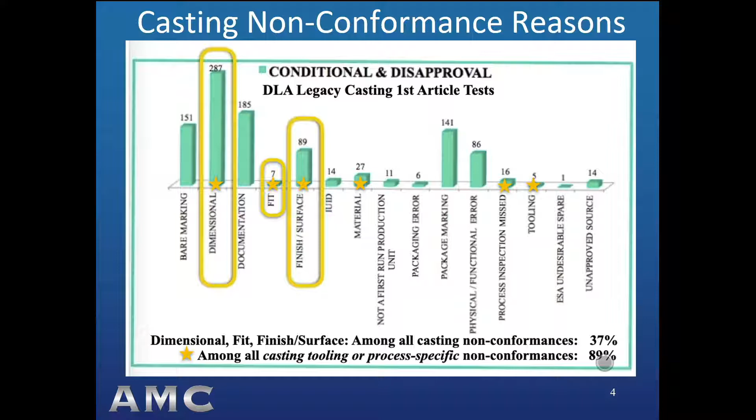Let's investigate why. The major and most difficult to solve problem in making casting dimensions comply with tolerance specification is the phenomenon I call pattern maker's contraction, commonly referred to in metal casting jargon as the shrink rule. When materials solidify from liquid, most of them, including all metals, form a crystal structure that's smaller in volume than the atomic arrangement in the liquid.

This is different from solidification shrinkage, so that's why I prefer to call the phenomenon pattern maker's contraction, to avoid confusion in terms. Interestingly, ice expands to a larger crystal structure than the atoms of liquid water, and that's why ice cubes push up out of the ice cube tray and are larger. Well, the opposite phenomenon occurs with metals in casting molds - the metal wants to get smaller, and the mold pushes back.

As the crystal structure is formed, the dimensions get smaller, pulling away from mold walls and often causing distortion as the mold pushes back in local areas. So the consequences of shortening dimension lengths is difficult to predict, but it gets worse.

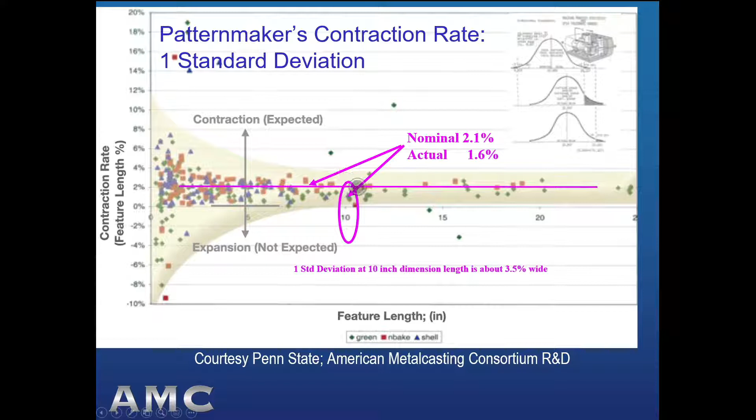But in this case, we actually got 1.6%. So you can see that even at a longer dimension where the one standard deviation gets smaller, we still have significant variation.

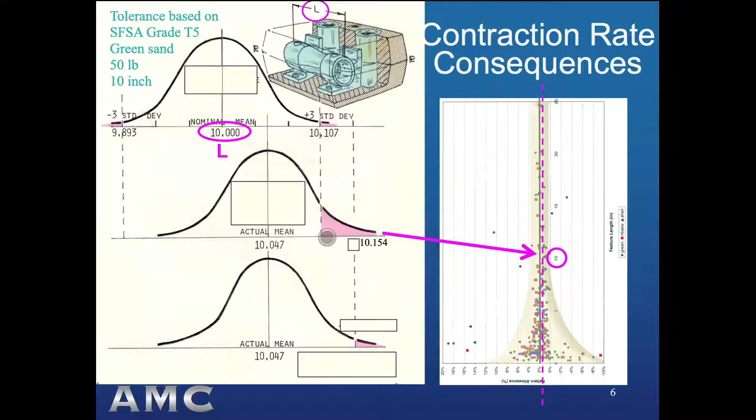So a pattern maker's contraction rate is a guess made by the mold cavity tooling builder, and the data shows why that guess is problematic, and it shows why dimensions are so difficult to achieve correctly in the first article inspection. But that data with all the variation was just for one metal alloy family, the carbon and low alloy steels.

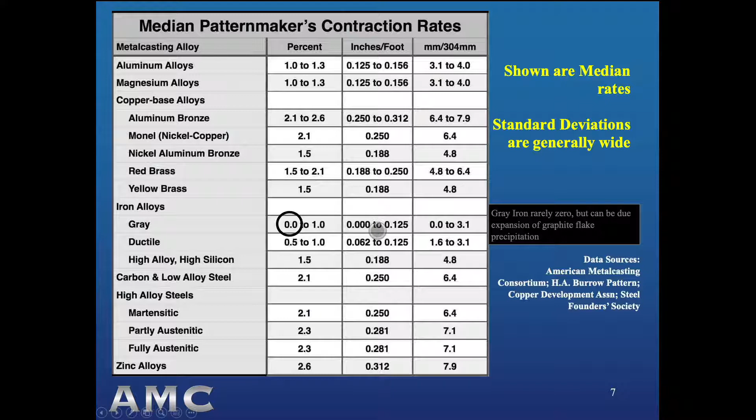Look here at all of the many metal casting alloys, and look at the difference in the center column, which is the standard parameter, inches per foot of contraction, and just look how much the median rate for each of these alloys differs. When I was making castings, here's a chart that I used to help me and my mold cavity tooling builder collaboratively make better pattern maker's contraction rate guesses.

If we missed, we missed. We would have to fix the tooling and make new prototype castings to see if we did fix it, but we tried, and at least we thought about it carefully.

Now, look at this center column labeled full, marked in light orange. Full means that after we chose the contraction rate, we built the tooling on the large side of the dimensional range. For risky dimensions, that meant that when we missed the contraction rate, which we sometimes would, all we had to do was remove some tooling material to fix it. With metal tooling especially, having to add small amounts of material to the tool is a disaster for tool life.

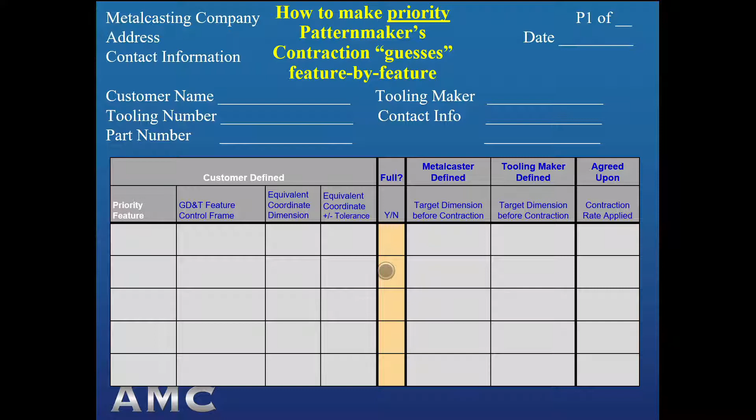The next most significant variable in the control of dimensional tolerances, but much more controllable, is mold degrees of freedom. In other words, freedom of movement in the assembly of the mold cavity. Most casting molds are assemblies of mold halves, cores, chills, and perhaps printed mold elements from additive manufacturing, but not all molds.

Some are close to monolithic, most notably investment castings and sometimes die castings and lost foam castings. As we will see in an upcoming slide, even those mold cavity making processes can have degrees of freedom that affect dimensions, but not as much freedom relatively speaking.

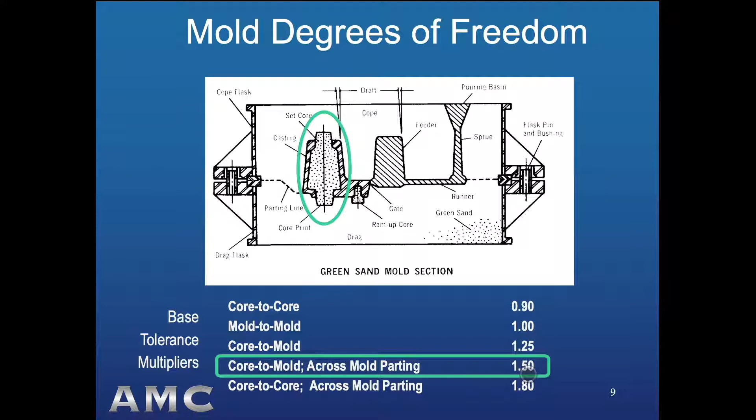The consequence of the variation in the mold assembly results in a tolerance coarsening of 150%, or 1.5 times the base tolerance of the features formed in the bottom half of the mold only. So if the tolerance for the hole formed in the bottom of the tall core is plus or minus 2 millimeters, then the tolerance for the hole formed at the top of the core is 1.5 times that base tolerance, or it becomes plus or minus 3 millimeters.

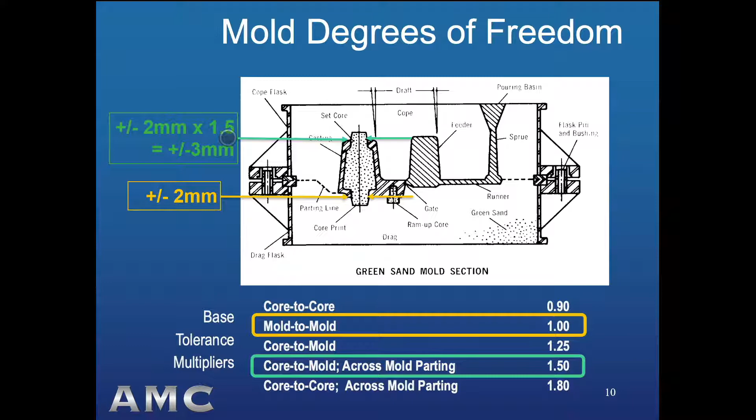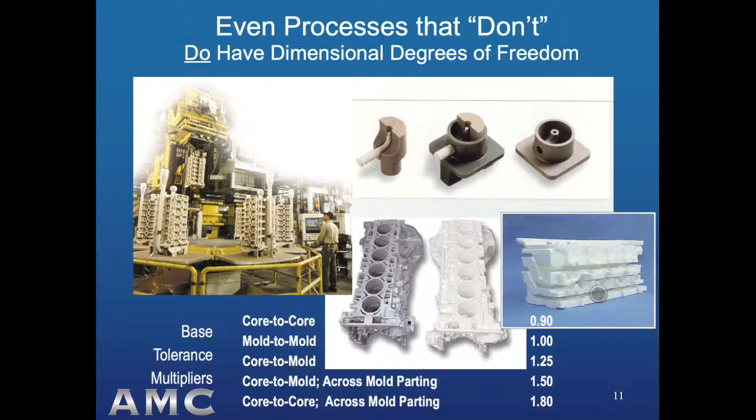The idea of draft is most easily visualized as a cupcake in a cupcake baking pan. If the pan doesn't have slanted sides in the cupcake pockets, the cupcake can't be removed from the pan. Since baked cupcakes don't have much tensile strength, very much pull on the cake will break it. So that slant in the pan pockets is largely there to enable release from the pan with little force, to get the cake to release from the pocket's side surfaces.

Pulling mold cavity elements out of tooling to form casting molds is the same. Some materials like wax are slick and relatively strong, so the slant can be small. Other materials like green sand are not very strong against a pull, so the slant has to be much larger. Getting a solidified casting out of a metal mold requires a much larger slant still. That slant is commonly expressed as an angle known as draft. For the metal casting processes and their tooling types, that angle commonly varies from half a degree to 3 degrees, and in some cases can be as large as 5 degrees.

Standard practice in specifying draft in casting designs is to define it as the draft angle. But that angle, which seems appropriate enough, causes first article approval problems all by itself.

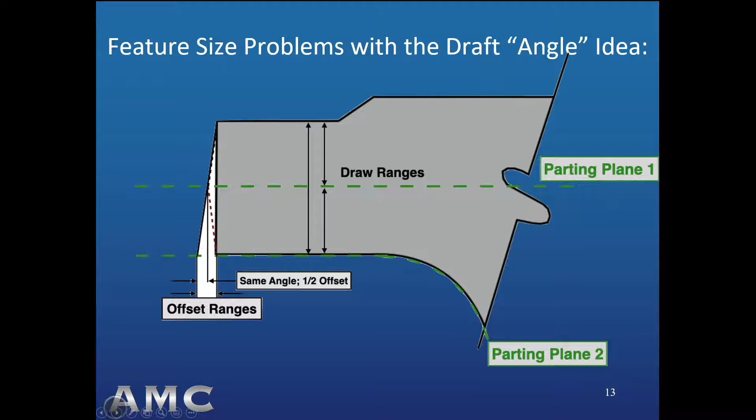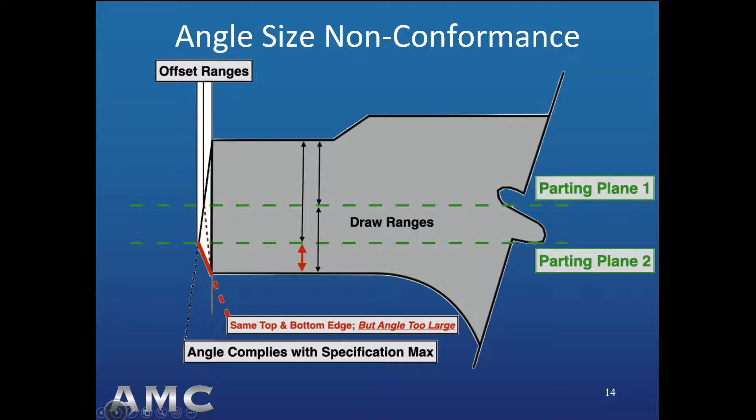The summary of draft angle versus draft offset and draft draw length concludes our discussion of the reasons for dimensional non-conformances in first article inspections. You will recall that the major cause of first article non-conformance in DLA's study of all causes was surface finish. Together with dimensional issues, surface finish inconsistencies are the other major contributor to the 89% of all casting-related first article non-conformances. Here's Mike again to explain surface finish.

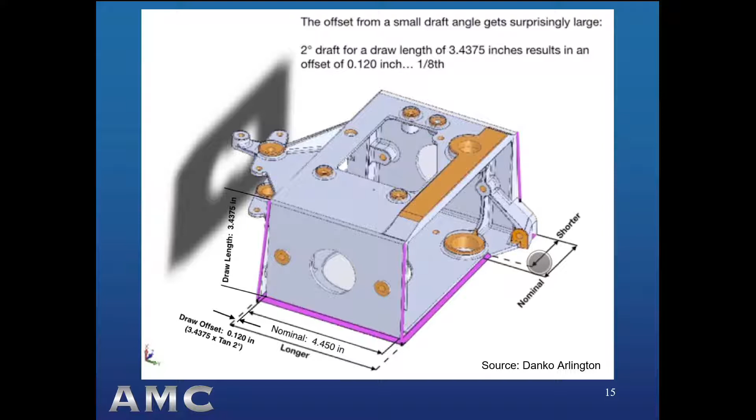We've now seen the factors that complicate dimensional tolerance compliance in first article inspection, but now let's look at the other major cause of casting non-conformances, which is surface finish. Surface finish, along with dimensional tolerances, compose 37% of all casting non-conformances in that DLA Pareto chart, and 89% of the non-conformances that are specific to the casting processes and the casting tooling. So first of all, let's just look at how surface finish should be measured.

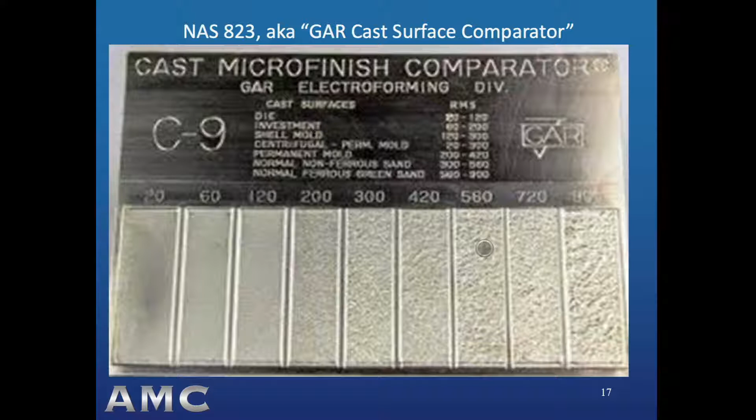This is the National Aerospace Standard 823, also known as the GAR Cast Surface Comparator. Basically, these surfaces are replicas of actual casting surfaces, and this is the best way to evaluate a casting surface because you can hold the plate up against the light at different angles, touch it, touch the casting, and make a visual and tactile comparison of surface finish most effectively this way.

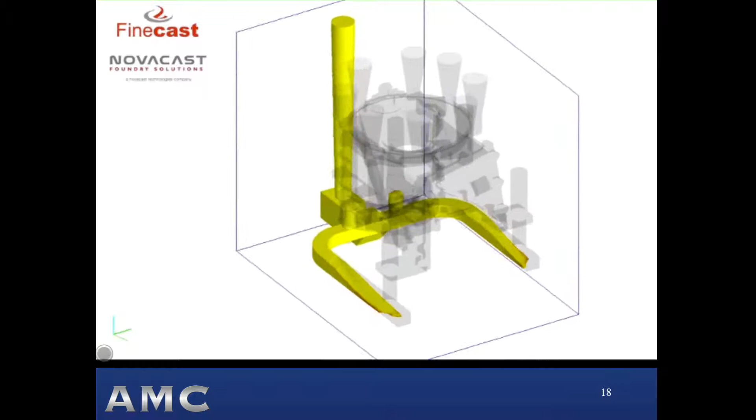What then complicates the surface finish if that's all there is to it? Here is the reason: a mold filling. This is an aluminum automotive casting in a safety critical application, and it is being filled as it really occurs in the mold. So what we're seeing is the mold cavity being filled, and attachments to the mold cavity that enable the filling and also feed solidification shrinkage to achieve the specified mechanical properties.

So all of these attachments from the mold filling system, from the risers which feed solidification shrinkage, and even some surfaces that may have a chill against them to help solidify quicker, all of those surfaces aren't like the surface comparator we just looked at. These surfaces are actually cut away by a cutting operation depending on the alloy, then lightly ground to try to replicate this original profile, and then media blasted to make the grinding marks go away and look like the as-cast surface as much as possible.

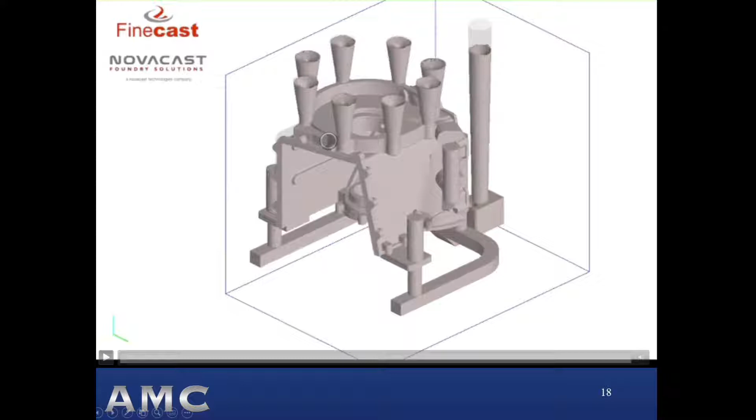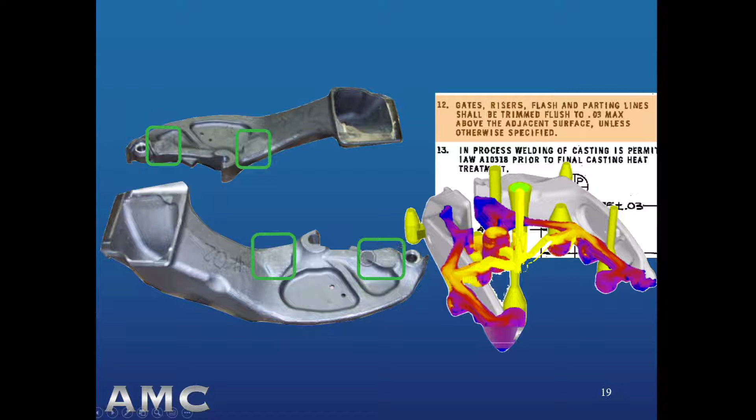Well, notes like this help: gates, risers, flash, and parting lines shall be trimmed flush to 0.03 of an inch max above the adjacent surface unless otherwise specified. And that's the kind of callout that allows this raised surface here and here.

As we have seen, all castings have surface anomalies from process interface geometry - that is, the gate, riser, chill, and vent attachments that have been cut off. The remaining stubs are ground down by hand to match the adjacent as-cast mold cavity surface finish as closely as possible, and then the casting is media blasted to smooth out the grinding marks.

The same surface treatment process is applied to another cause of casting surface anomalies. This cause is in-process weld rework, a normal finishing process on any weldable metal casting alloy. In-process weld rework is a normal consequence of liquid metal mold filling, solidification surface imperfections, or finishing handling. Most common anomalies from pouring and solidifying are non-metallic inclusions and incomplete edges on fine corners of the casting geometry, as we see here. Casting finishing processes cause surface anomalies too.

Most common in finishing processes are the dents and dings from handling, overgrinds, and small quench cracks from heat treating. Extremely shallow surface anomalies are often blended away by hand grinding, leaving a very shallow minus metal profile on the casting surface.

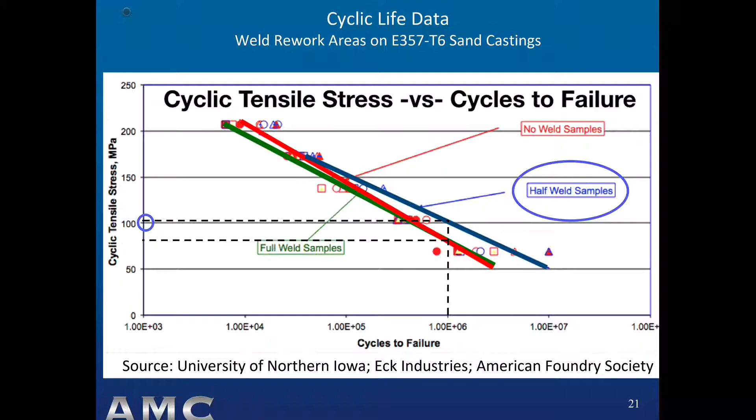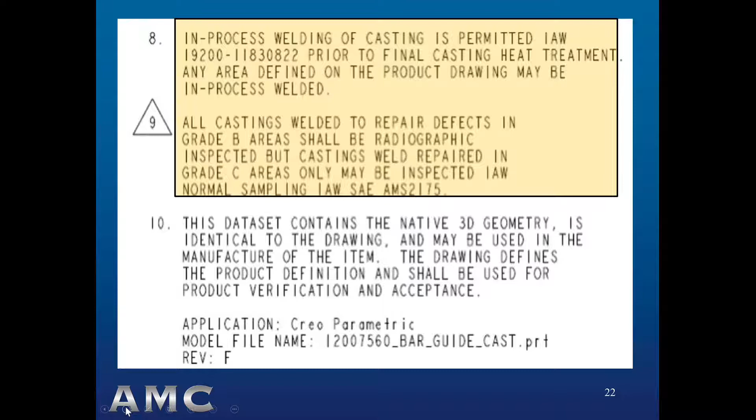Here's a well-crafted drawing note specifically allowing in-process weld rework and differentiating grade B and grade C solidification areas in accordance with AMS 2175. Returning to the same example of the in-process weld rework of the aluminum casting with the sand inclusion defect, here is the non-destructive testing documentation that the weld repair we see meets AMS 2175 grade B solidification integrity.

Now please meet our CASTED teammate, Keith Sturgill. Keith is based at the Defense Logistics Agency's Aviation Supply Center in Richmond, Virginia. Keith supports CASTED efforts from inside DLA as a graduate materials engineer, with a career in the Navy specializing in jet engine materials and components.

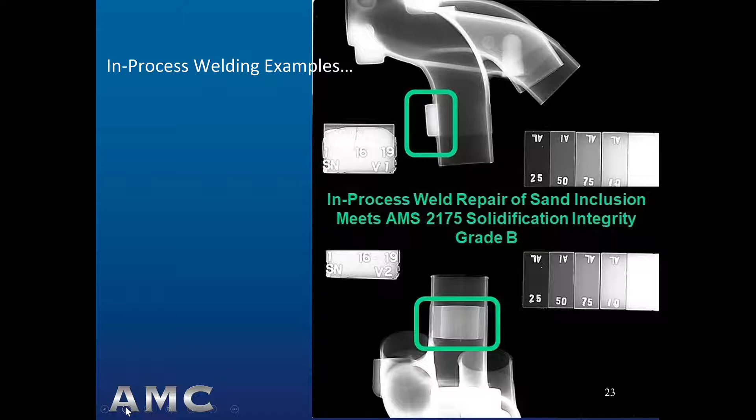Keith will give us an overview of the roles of the 4 who's involved in the preparation and inspection of DLA legacy casting first articles. Here's Keith. As Mike has said, there are 4 who's in the production, inspection, and approval of DLA Cold Start legacy casting procurements.

As an overview and as a notional estimate using the 80-20 rule, here are the relative responsibility percentages for casting quality of the 4 who's that Mike talked about. First, the Cold Start new awardee has about 80% of the responsibility. Second, the first article inspection lab has about 10%. Third, the engineering support activity about 7%. And lastly, the Defense Contract Management Agency has about 3%.

In addition to having the most responsibility by far, the Cold Start new awardee is typically a team of suppliers, frankly, in both the private and military/aerospace sectors. The recipient of a purchase order or a contract typically doesn't think of their business as a member of a team of businesses.

70 years ago, when manufacturing businesses were vertically integrated, one company had the breadth and depth of talent, resources, and plant equipment to manufacture complex engineered components complete and in-house. Occasionally, a metal caster will encompass all necessary processes, but it is now rare.

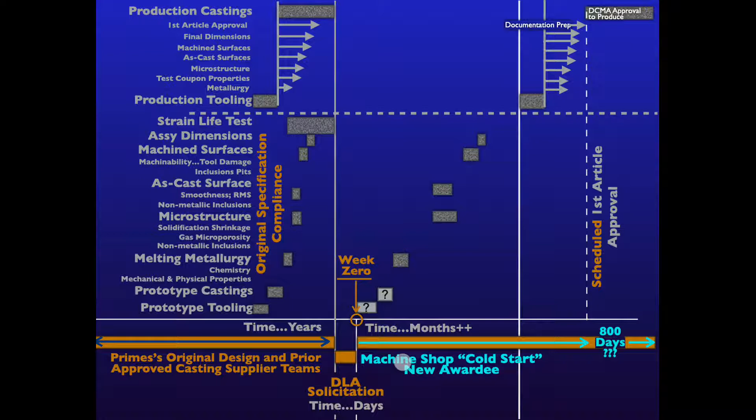In fact, that's the average of airframe castings that are in this legacy category, manufactured primarily now by machine shops in partnerships with the 4 other businesses that we've talked about. So this whole process has to be started afresh, has to be done immaculately, and is most likely being done by a machine shop.

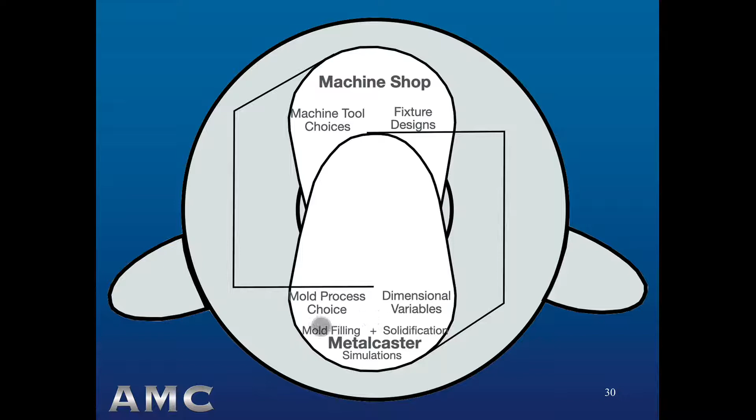So what can we recommend to make success more likely than lost time, lost resources, and 800 days? Here's the skeleton of a Venn diagram defining the roles of the 5 separate cooperating businesses that are the metal casting supplier team. We will assume that the Cold Start new contract awardee is the machine shop. Might also be the metal caster, as it traditionally has been, but now most likely is the machine shop. In the middle is the mold cavity tooling builder, who will collaborate with both the machine shop and the metal caster, whether it be intentional or not, whether it be integrated or not, but it should be both.

Well, where are the other two? The heat treater and the coater are around the perimeter because they might be part of the metal caster's vertical integration. In other words, many metal casters have their own heat treat facility. Sometimes they have their own coating capability. In that case, there are only 3 in the center cooperating business partners.

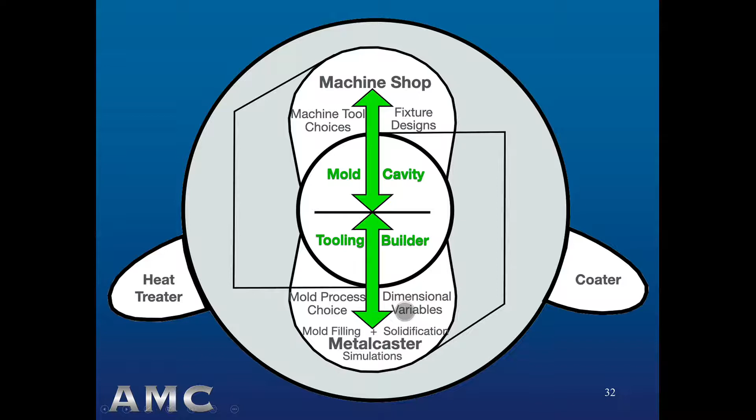Well, here are the roles that all of the big 3 play. The machine shop makes the machine tool choices and makes the fixture designs to get from as cast to a final net shape. The metal caster makes the mold process choice, deals with the dimensional variables in the design and construction of the tooling and the choice of the mold process integrated together, does mold filling and solidification simulations.

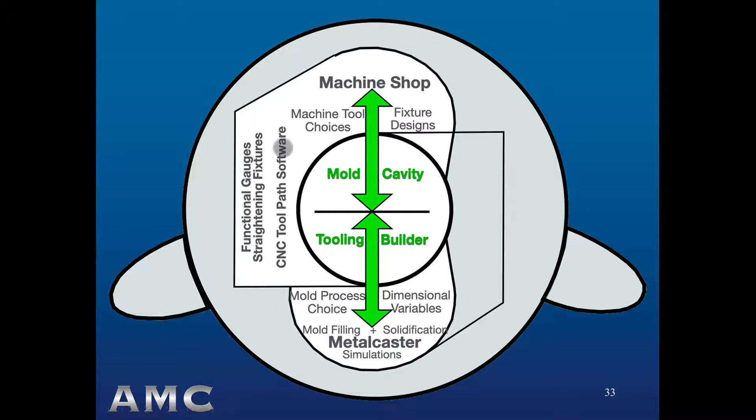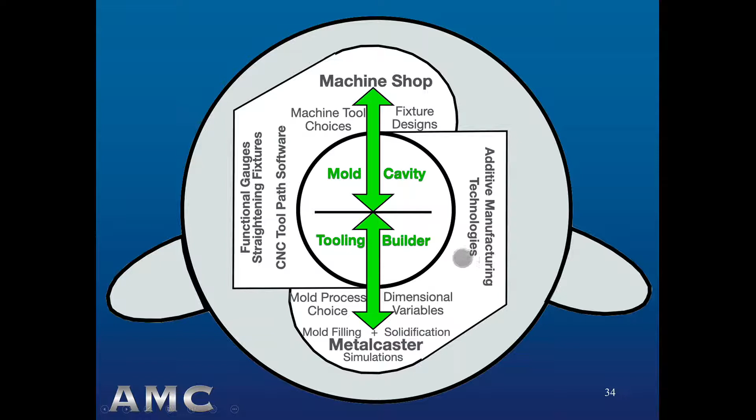The mold cavity tooling builder is involved in the functional gauges and straightening fixtures that usually are part of the metal caster's finishing process. Also does the CNC toolpath software to actually create the mold cavity tooling. And also has the mold cavity tooling builder the additive manufacturing technologies either in-house or among partners that have additive manufacturing technologies. But there's another significant capability that the mold cavity tooling builder has that's unique.

It's the mold cavity tooling builder that builds the solid models that we talked about before. First, the solid model from the 2D drawing, if it's a legacy casting with a TDP package that is old and doesn't have a solid model, which is typical, and has all the software expertise to make the solid models not only of the 2D drawing conversion, but also to add draft, the mold parting planes, the match planes between cores and slides and assemblies of the mold cavity, and the draft.

Also has expertise in geometric dimensioning and tolerancing, and has access to know-how that has application in how all that technology is applied to the 3 versions of the solid model.

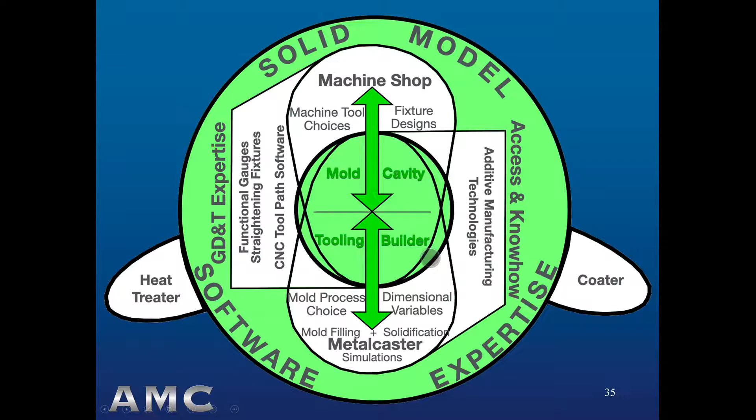Well, Gary Burrow, who spoke to you about draft, is one of these mold cavity tooling builders. And the green areas are so significant, it's our recommendation that regardless of who holds the contract for the Cold Start new award, whether it be the machine shop most likely or the metal caster, it's the mold cavity tooling builder that should be the technical lead of the intentional collaboration to make the manufacturing engineering happen successfully. Well, Gary is one of those guys, and here's Gary to explain how he does this.

Over the 4 generations of the Burrow family in the mold cavity tooling design and construction business, we've cultivated individual relationships with a variety of metal casters serving the Southern California commercial, defense, and aerospace industries. Given that variety of casting end uses, we developed a wide spectrum of expertise in mold cavity making processes and alloy families. Now I have a national presence as a technical lead in the metal casting supplier teams that I serve.

Having established that expertise as technical lead, I frequently take turnkey responsibility as the contract or purchase order holder for delivery of finished castings, including DLA cold start legacy systems.

As Mike was describing the roles and abilities of the 5 primary business partners of a metal casting supplier team, those areas he highlighted in green are what I do. In my turnkey role, being responsible for delivery of finished castings, here's a list of what I do in collaboration with my metal caster, machine shop, heat treater, and coater partners.

Initially, during the bidding process, I make selections based on the requirements of the finished casting, including the best mold cavity making processes based on the dimensional, surface finish, and solidification integrity required in the finished casting specifications. What additive manufacturing technologies could augment the mold cavity making processes, either in direct printing of tooling elements or direct printing of mold cavity elements in natural sands, ceramic sands, or ceramics.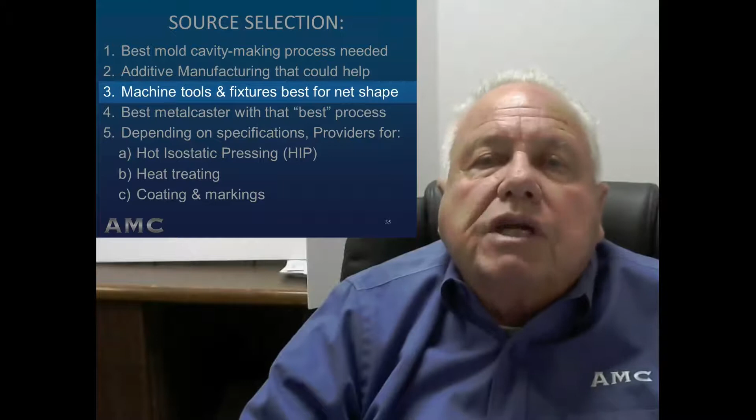The best metal caster nationally that is capable of producing the best casting using that mold cavity making process. Selecting a hot isostatic press or hipping press provider if the solidification integrity and dynamic property requirements are very high, beyond the capability of the chosen mold cavity making process.

The best heat treater based on the chemistry and microstructure of the chosen alloy and the probability of fixturing for heat treat and or fixturing for straightening afterwards. The coater based on the chemistry and processes of any specified coating, including markings.

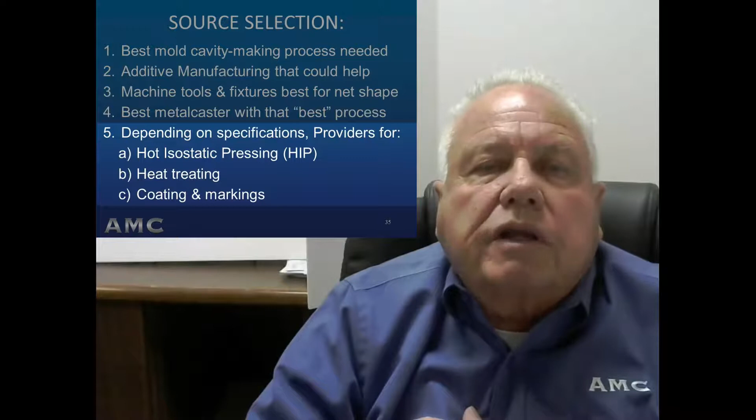Whether I wind up being turnkey source or the technical lead as a collaborating partner in the metal casting supply team, here's what I do in those green areas of the manufacturing engineering collaboration graphic.

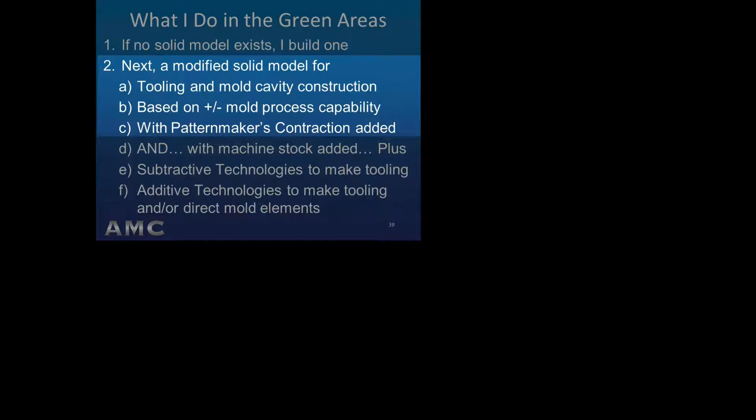If no solid model exists, we build a solid model of the as-cast and/or finished casting from the 2D drawing. Based on the manufacturing engineering collaboration with the metal caster and the machine shop, we build a modified solid model that adds the mold parting planes, mold draft, core to mold match lines, core print to mold match lines, core and core print drafts, chill prints and chill print draft, and connection surfaces for the in-gates, risers, and vents. This geometry defines the actual as-cast features of the casting as it is formed by the liquid metal.

As a preface to estimating the pattern maker's contraction rate for all of the manufacturing in the second model, I convert all of the GD&T tolerance of position and profile to old school plus minus coordinate tolerances. I do that because building tooling for the molding cavity has to be converted to plus minus, just as the dimensional capability of the mold making processes is necessarily expressed in the old school plus minus process.

To accommodate pattern maker's contraction, the second solid model's features are increased in size based on the alloy's pattern maker's contraction rate. The metal caster and I collaborate on what that normal rate should be, which varies substantially by alloy. It should be modified for each significant or critical dimension on the casting.

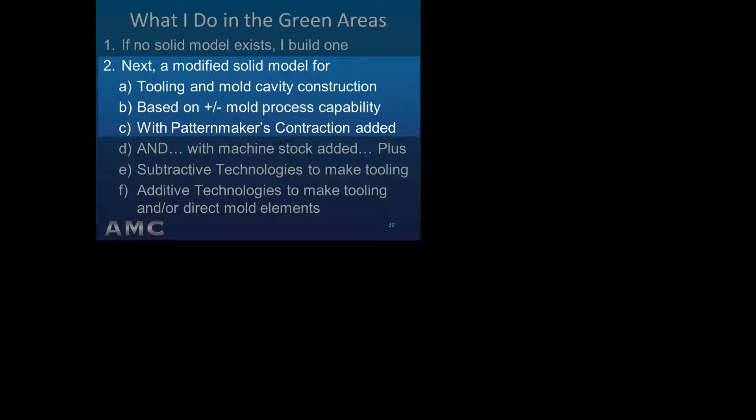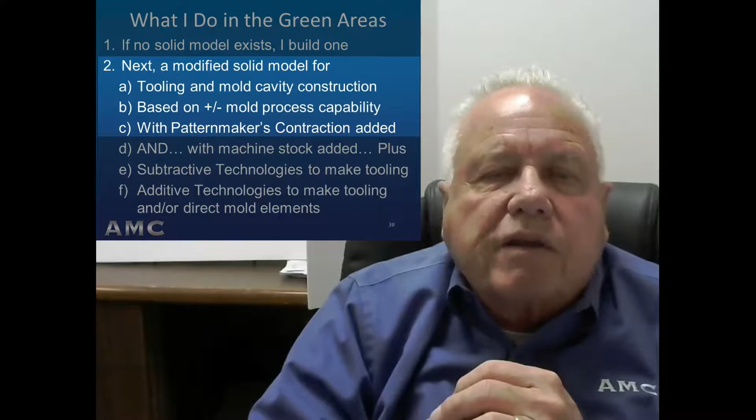Pattern maker's contraction rate is always a guess. Mold cavity builders always make the guess, but it is best to collaborate on guessing with the metal caster's experience included. Better guesses make fewer tooling adjustments to correct dimensional nonconformances later.

Along with the increased model size for pattern maker's contraction, if the net shape is to be upgraded by machining, we add machine stock to the cast surfaces that will require machining.

From the modified solid model, we use any of the following manufacturing technologies to create the tooling, tool elements, and direct printed mold cavity elements: subtractive tool path geometry and CNC machine tools to form mold elements, core box cavities, and chill mold cavities.

Subtractive or additive technologies to create cavities that become core boxes or molded pattern elements. Additive technologies to make quick prototype sand molds or investment mold patterns. Additive technologies to make production printed investment patterns or printed sand or ceramic mold cavities for sand molds.

We mold cavity tooling builders either have to have or have access to the additive manufacturing technologies needed. Some of these technologies are located at universities, AM providers, or AM service bureaus. Even direct printed sand mold elements are durable enough to be shipped to the metal caster's facility from AM sources around the country.

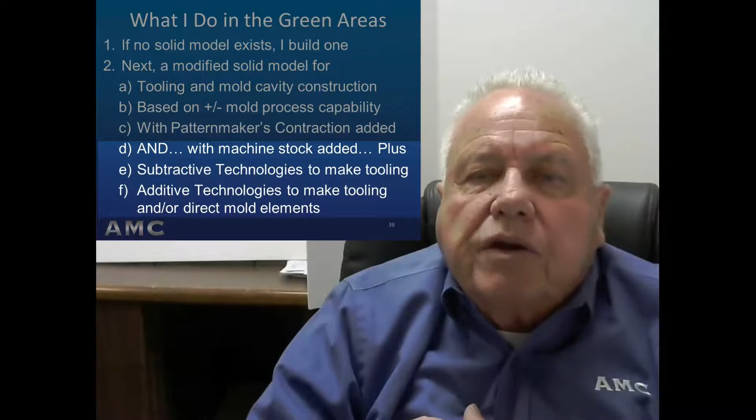For the different fixtures needed for processing from the as-cast surfaces, we can produce a 3D solid model that removes the casting manufacturing features such as core and chill prints, leaving only the drafted surfaces with mold, parting, and core match lines, in-gates, risers, vents, etc. We can then remove the pattern maker's contraction size increases.

For building fixtures for processing as-cast surfaces, including heat treat and machining setup fixtures, this solid model is a great asset. Since I am responsible for the pattern maker's contraction estimates, which are at best educated guesses, I encourage the metal caster to make quick, unfinished prototype castings to see how significant and critical dimensions actually come out to be. I can help with versions of this production tooling made quickly for prototyping from additive or subtractive manufacturing technology that I have or have access to.

Not many of my mold cavity building peers take the initiative like I do to be the technical lead in integrated manufacturing engineering for first article approval success. But they do have the know-how and assets to collaborate. They just need to be asked and encouraged to take the technical leadership for everyone's benefit.

Julia will now rejoin us to conclude part 1 and provide a quick summary of part 2.

From a Defense Logistics Agency study of legacy casting first article nonconformances, we learned that 74% of nonconformances are attributed to dimensions and surface finish. This is known to be typical across defense and commercial first article inspections of castings.